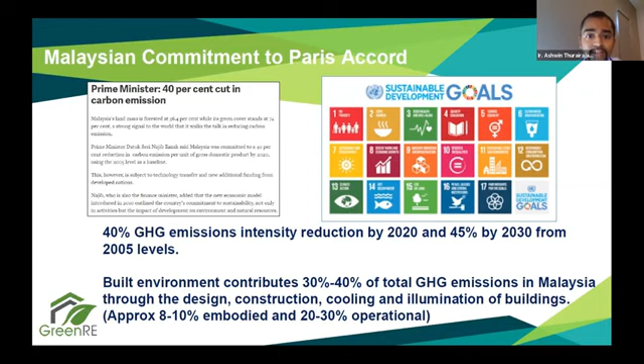If we go to the next slide. So it is no surprise that the focus at a regulatory level, at a policy level, even through voluntary standards that are there, has a strong focus on energy usage. We have the minimum energy performance standards for domestic appliances. This is the rating standards that ST uses to label basic domestic equipment. For larger commercial and industrial consumers, we have the EMEER, efficient management of electrical energy regulations. Then we have two voluntary standards I think most of you will be familiar with, MS 1525 which is energy efficiency standards for non-residential buildings, and MS 2680 for residential buildings.

Currently, as A.R. Chan mentioned earlier, UBBL 38A, there's an amendment to the UBBL. However, this has only been gazetted in 3 states so far. I think we look forward to it being gazetted across Malaysia, which has incorporated some elements of MS pertaining to energy into it. And upcoming, we have the Energy Efficiency and Conservation Act. I think this is currently still being run through or debated in Parliament, but effectively when this comes through, we will be setting energy performance standards for various industries. And we move to the next slide.

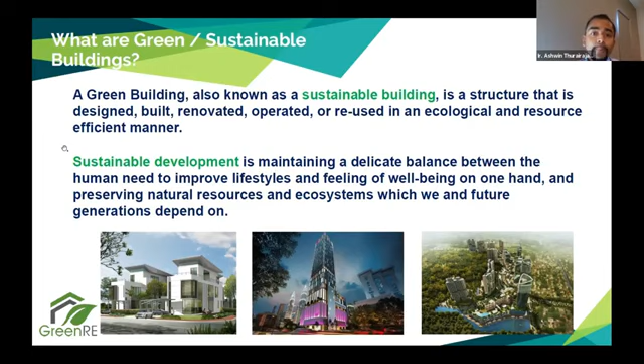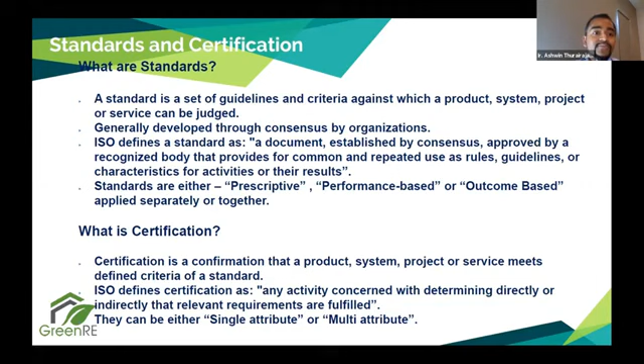Now, before I go into what we do, we talk a lot about green buildings, but how do we define these buildings? So we need standards for that. Standards are established by consensus, approved by a recognized body that provides for common and repeated use as rules and guidelines. These standards can either be prescriptive, performance-based, or outcome-based. So I think the best way would be to have all 3 included. We should be highlighting what needs to be done and then measuring this. Now that is the standards alone, but we need certification as well. If it's not independently verified, it doesn't get done. So that is why standards development and certification should go hand in hand.

Next slide. So that is where REHDA has set up GreenRE, which stands for Green Real Estate. We develop standards for green buildings, and we also do certification. To support that, we have a lot of training activities where we have accredited facilitators to undertake these activities. Our standards have been adapted from Singapore Green Mark, which is an internationally recognized certification tool. And to date, we have certified more than 200 projects in Malaysia.

Next slide. When we talk about green buildings, universally, I think there are 6 major pillars. The most important one would be energy efficiency. Here we look at both passive and active design. We also look at incorporation of renewable energy into a building. Then we look at water efficiency. This is growing in increasing importance here in Malaysia. I know we have an abundant amount of water, but we should be doing our best to conserve this resource.

Environmental protection, where we look at sustainable construction, the integration of sustainable products, incorporation of more greenery into a building. When we look at TODs, high density, especially in urban environments, we should look at creative ways in which to incorporate greenery. So we use something called a green plot ratio to evaluate the effectiveness of greenery that is there, encouraging buildings to use their rooftop space, their walls, common areas, incorporate as much greenery as possible into the building. And the type of plant species used is very important, because various types of plants have different greenhouse gas capturing potential.

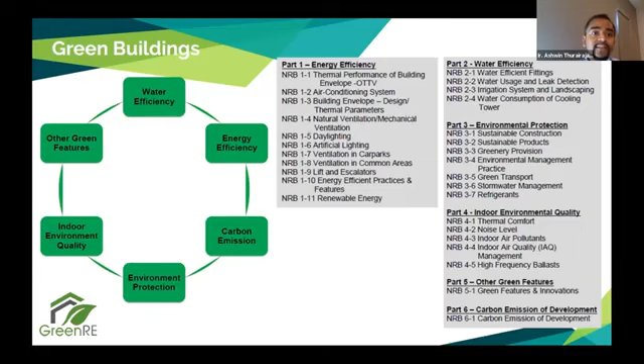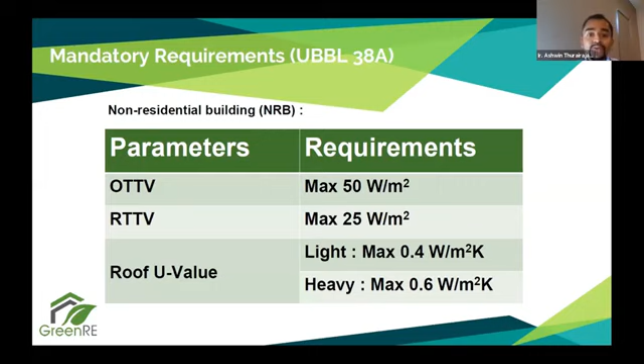Okay, next slide. So this has been covered earlier as well. As I mentioned, the UBBL 38A, which has been gazetted in a few states, covers these major components: OTTV, overall thermal transfer value, which is the heat ingress through the facade, through the skin of the building. And we should try to minimize that to reduce the cooling penalty from the heat transferred in. So that's for the facade, and then we look at the roof as well. The roof is the most exposed to the sun. So by using materials with U values that do not exceed the limit set, we can limit the amount of heat coming in.

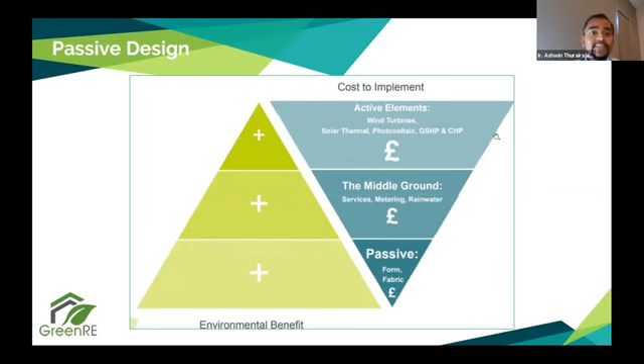Okay. Now, when we talk about greening commercial buildings, I will start off first with passive design. I think this is the cheapest way to limit the energy use of a building, but it has to be thought of early on in the design. It is cheapest when it's thought of early on. It becomes very, very expensive if you try to incorporate or change the way the building is designed passively later on, before we move on to active. Now, what do I mean by passive design?

Firstly, the easy kill would be the orientation of the building. In Malaysia, most of the heating occurs in the east and west. The west particularly, because more of the day is exposed to heat in the evenings. So we should try to orient the building away from the west, or reduce the amount of window area that we have on the west facade.

Some other creative ways could be to move typically what is building core items, like your lifts, your staircases, circulation areas to the edges of the building, rather than putting it in the middle. And then your offices, you try to incorporate either in the middle or towards the north and south of the building. These simple strategies are a design parameter that can be put in by the architects, and can already reduce up to 5% of the energy consumption of the building.

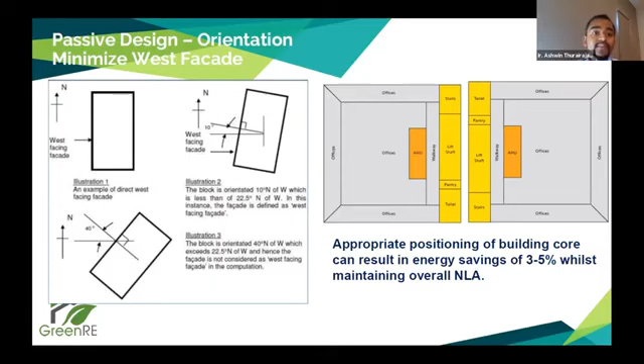Next, we should try to harness as much natural ventilation as we can. In Malaysia, most of the prevailing wind is from the north and south orientation. So if we design our openings, the windward and leeward, to face the north and south direction, we can maximize capture of natural ventilation. Apart from that, we can use things like stack ventilation. This is where hot air is generally quite buoyant. So we have louvers at the top of the building, or some sort of extract mechanism, to encourage air movement within the building.

We should also start thinking, and we encourage architects, about atriums which need not be air conditioned. They can be passively designed. Circulation spaces like corridors, why should we be air conditioning these? You can actually achieve a lot of good thermal comfort through shading and natural ventilation, and that's what we try to capture through our certification standards.

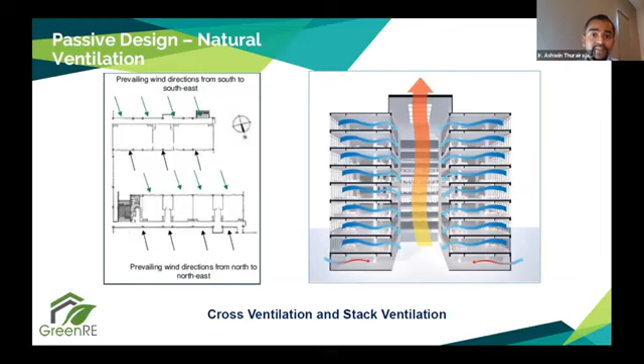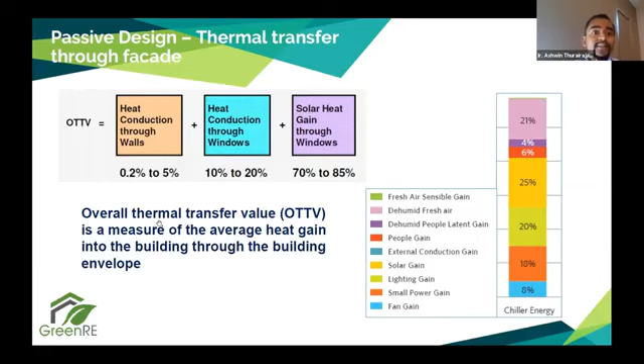Okay. Of course, as I highlighted earlier, overall thermal transfer value is a function of heat conduction through the walls, through the windows, and of course the biggest component is solar heat gain. So if you want to have a full curtain wall design, a lot of glass, then you have to spend a lot on reducing the SC value and U value of the glass. But even easier would be to just reduce your window to wall ratio. Why do we need so much glazing? So this doesn't have to be an expensive component. Achieving an OTTV value of below 50 is not difficult. We just need to design a building for its intended purpose properly.

Okay, and 30% of your cooling requirements actually come through heat ingress through your building facade. So OTTV is a very important parameter, because by reducing the heat through the building, you have a very strong likelihood of reducing your air conditioning sizing.

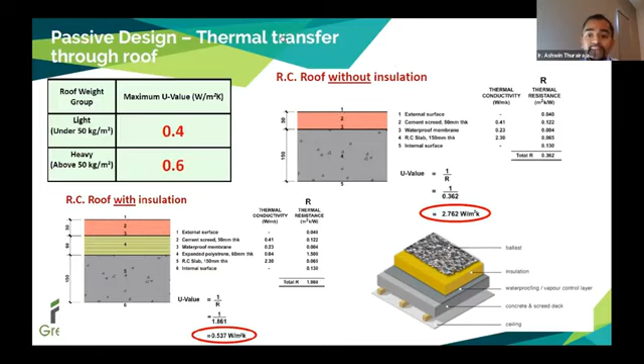U value, as I mentioned, is a measure of the insulating properties of the materials that are used in your roof. I won't go into too much detail on this, but effectively you can see the difference between incorporating a little bit of insulation onto a concrete roofing structure and the dramatic improvements in U value that can be seen. In my screen, the bottom one seems to be blanked off, but I think you can see it all.

Daylight harvesting to reduce the need for artificial lighting. Of course, this has to be carefully designed so that it doesn't bring in too much heat. So we look at ways in which you could use light tubes or some sort of glare reduction strategies to bounce light into the building effectively. So this is an important thing to consider.

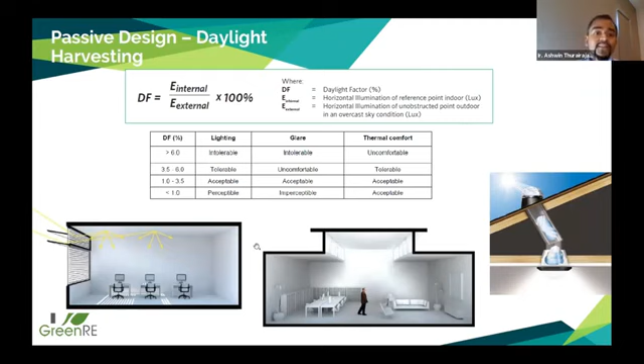And then we move on. So that is passive. If we move towards active design, of course, we cannot eliminate air conditioning altogether in a tropical country. So it is important that we move for more energy efficient designs. So we use a metric called kilowatt per ton. So this is the amount of electrical energy required per ton of cooling, air conditioning cooling. And we encourage buildings to move towards more efficient designs.

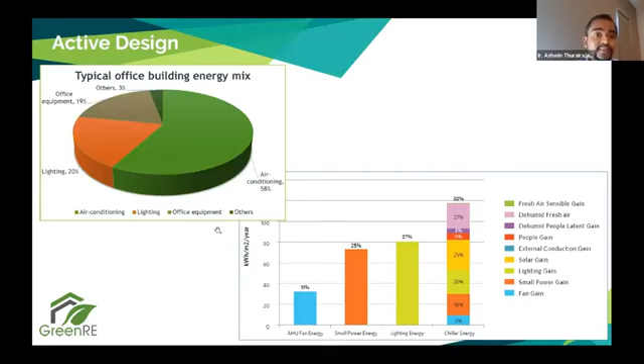There may be a cost premium, no doubt. However, the return on investment can be as low as 2 to 3 years. Okay, especially for larger buildings that have an air conditioning tonnage of more than 500 tons, we encourage them to go for centralized HVAC system, not to go for split systems. Centralized HVAC systems can give you a better efficiency.

Okay, lighting, of course, many of you are familiar with LEDs and T5. I think this is something that has proliferated the market quite substantially. And I think the cost of incorporating or using these solutions is almost on par with less efficient technologies. So that is what we should aim for air conditioning as well. By creating economies of scale for more efficient equipment, we can make the more efficient equipment the de facto standards.

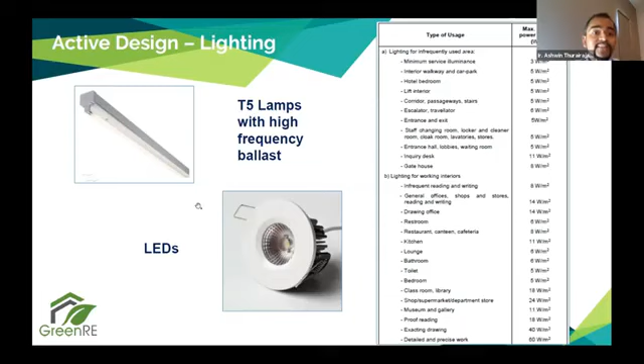Okay. And then, of course, apart from using efficient lighting, we should also think about how we zone it and how we switch and turn it on or off. Simple things like using motion sensors or photo sensors. Motion sensors in areas where people are not frequently using, so lights turn on only when you're there. Photo sensors maybe in the perimeter of the building, so that in the office, the tables or people seated closer to the windows don't need to leave their lights on. That can be switched off automatically.

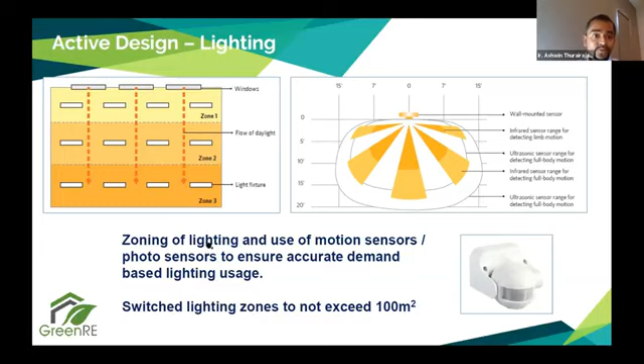And then, of course, we should not have lighting zones that exceed 100 square meters. This way, you are more likely to switch off the lighting when you don't need to use it. If your entire floor has only one switch, then just because of one person using the building, you're going to be turning on the whole light fitting. So careful zoning is also very important.

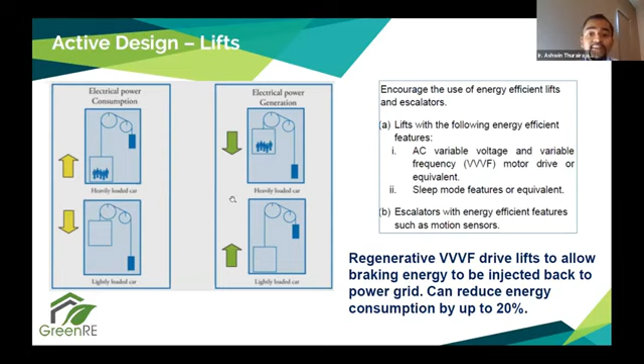Lifts, of course, next biggest contributor. So now we encourage AC variable voltage, VVVF lifts, and also lifts that incorporate sleep mode so that they shut off when they're not in use. Even better, for high-rise buildings, we have regenerative lifts. This uses braking resistors to sort of capture some of the energy that is utilized during the lift operation. And this can be used to power most of the lift controls, thereby reducing and in fact even sometimes pump back for your building usage. And this can reduce the energy consumption of the lift by up to 20%.

Okay, once we've tackled energy efficiency, then we can look at incorporating things like solar PV. This is getting cheaper and cheaper by the day, and there's a lot of incentives, especially net metering that is available. Our rooftop potential in Malaysia is tremendous. We shouldn't be thinking of large-scale solar. We should really be looking at using the available rooftop space for solar PV. The cost per kilowatt peak for installation is now at about 3,000 to 5,000 ringgit. This was at about 20,000 ringgit just about 3 or 4 years ago. So the prices are dropping, and this is almost like a no-brainer to incorporate into any building.

Okay, and of course, energy management system. This is another component that is part of the UBBL 38A. For commercial buildings that are more than 4,000 square meters, it is mandatory to have an energy management system. This is basically like a central brain that is able to control, change the set points, obtain readings, obtain feedback, and optimize the use of all the active equipment in your building. This is something that should not be discounted. It can be expensive to incorporate, but once again, the more we can measure, the more we can control, the better we're able to operate the machinery. Okay.

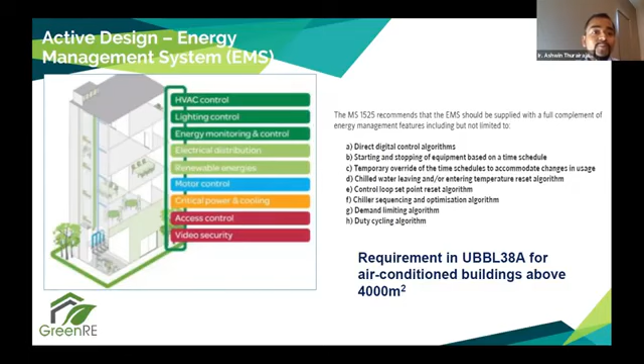And once we have all this, we can perhaps move towards zero energy buildings. This is something that is being encouraged in Singapore. And there's no reason why we can't start this off here, especially in urban centers like KL and PJ. Once we have brought the building usage down to a level where it can be replaced by renewable energy, particularly solar, we can fast approach net zero and perhaps even move towards net positive buildings. So that should be the direction we move towards.

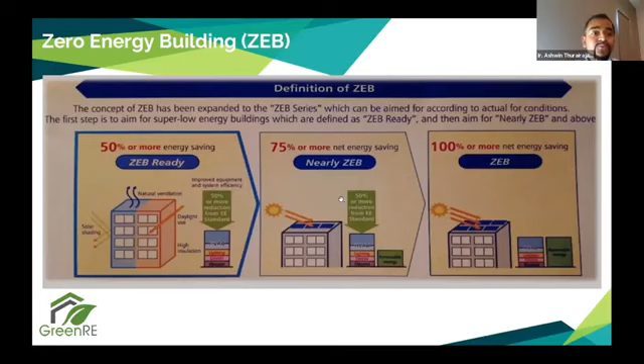And of course, the bulk of electricity in Malaysia, 90%, is still generated from fossil fuels. So by reducing electricity usage, we can reduce the impact to the environment through CO2 emissions. And on top of that, it's going to save you money. So this is the low-hanging fruit, the easiest way to tackle environmental concerns over CO2 emissions, and which also has a business case. I think this is something we should definitely tackle.

Well, and as we move on, of course, water efficiency. As I mentioned, Malaysians are one of the largest users of water in the world. In fact, we use 30% more than the UN recommended guidelines.

We use between 220 to 240 liters per day, and this is potable processed water. So SPAN is looking to introduce this WEPLS scheme to make it mandatory. WEPLS, we use it as part of our certification calculation. So as many of these fittings should be specified into a building from the onset.

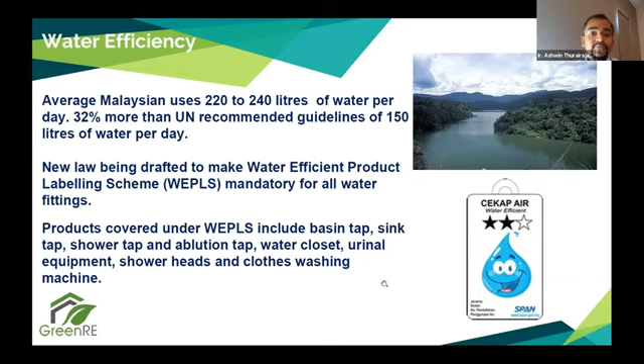Okay. Rainwater harvesting, I'm sure everyone is aware of this. In fact, this is mandatory in 6 states. Many people question the usage of rainwater harvesting in Malaysia, but we should look at it from a bigger picture. We use potable water for a lot of tasks like watering our plants and washing our cars. And as the urban centers grow, we can reduce the need to build water processing facilities, which has a tremendous energy impact. So that's how we should be looking at it holistically.

I know we are blessed with a lot of water, but in the long term, or globally rather, it is still a scarce resource. And if it's something that's cheap to integrate and utilize effectively, it should be done.

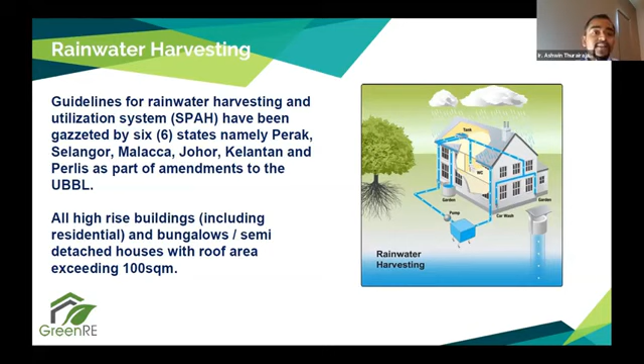Okay, environmental protection, I think this is a big topic when it comes to materials and sustainable construction, but I'd like to focus particularly on our use of cement. Cement production is responsible for up to 5% of our globally produced CO2 emissions. And there's many ways in which we can reduce the use of OPC. There's a lot of industrial byproducts like GGBS, silica fume, fly ash.

In fact, most of the major cement manufacturers are able to integrate this into the cement mix, up to 30% replacement without sacrificing the integrity of your concrete. And there's very little price premium for this. So we encourage as many building developers to specify this. Replacement of OPC with industrial byproducts. This has tremendous ability to reduce our CO2 emissions apart from energy consumption.

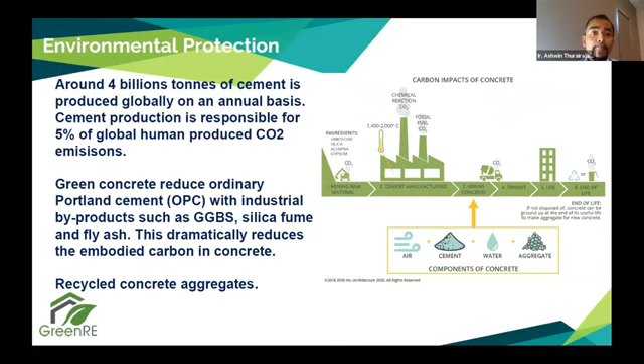Okay, and of course, indoor environment quality, run through very quickly. This is your thermal environment, your lighting, your sound, and of course, air. With the current COVID pandemic, I think it is imperative that we focus on this. I think one of the reasons tropical countries have had reduced rates of COVID is because we have better ventilation here, more natural ventilation in our buildings, which dilutes pollutants, and this should be encouraged as much as possible. Natural ventilation is the easiest, the cheapest way to enhance your indoor environment.

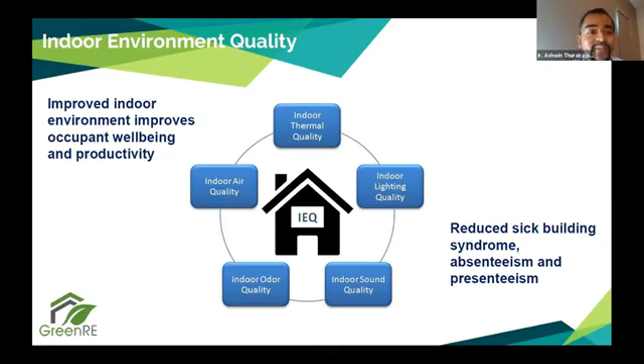This can also lead to reduced sick building syndromes and absenteeism and something called presenteeism also, where people are there but not really there. So the productivity is not quite at the right level.

Okay, just to summarize it, I think we can look at Wisma REHDA, which is our headquarters. We have incorporated a lot of the features that I mentioned. The orientation is south-facing to capture natural ventilation. The west facade is where we put most of the toilets and everything, so there's no offices on the west. And we've also reduced the amount of windows on that side of the facade, so it's only 0.8% of your facade area. The OTTV is well below 50 watts per square meter.

We have energy efficient fittings in the building, so the EEI is below 100 kilowatt hours per square meter per year. We have extensive natural ventilation and daylighting. More than 60% of the floor area is naturally ventilated. It's largely water efficient, all the fittings are WEPLS rated, and we also make use of the rainwater harvesting system.

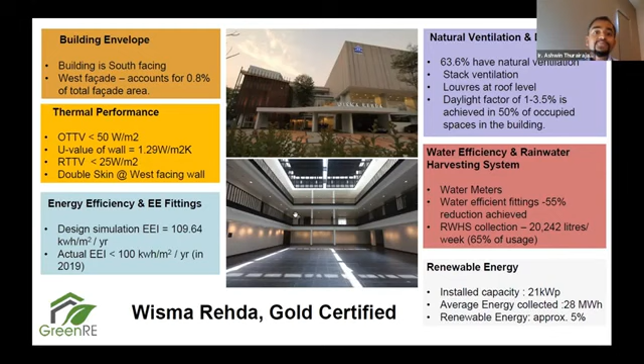And there's also a renewable energy system, solar panels installed on the roof. In fact, I need to update this slide. We now have 70 kilowatt peak of solar panels installed on the roof, which replaces up to 10% of the building electricity consumption. Okay, so to summarize, this is the framework by which we assess it. I think we can move to the next slide.

Okay, and the benchmarking that we use, of course, is the Malaysian standards 1525 for commercial buildings and 2680 for residential buildings. We need to have a baseline by which we measure the performance when we talk about green buildings. So we should definitely encourage as a minimum buildings achieving the Malaysian standards before going green.